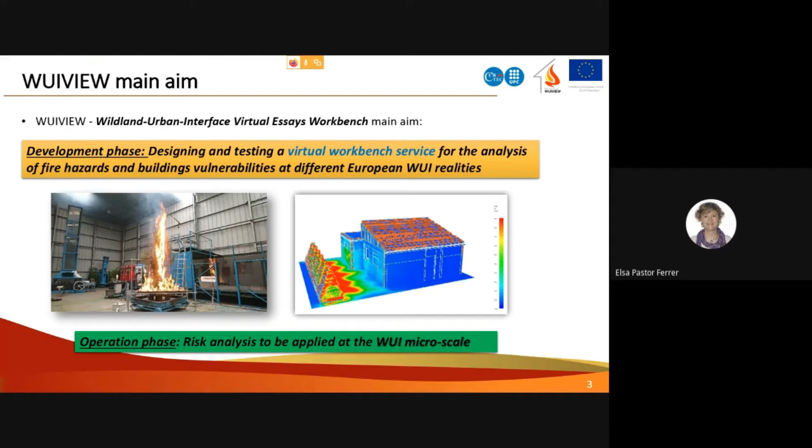By these 2 main core activities, we will be able to develop a risk analysis methodology to be applied at the WUI microscale. So we are focusing our work at this homeowner level. We are actually analyzing the problem at this very fine scale. How are we doing that? Which is our workflow? The overall activity of WUIVIEW relies on understanding patterns, factors, and processes occurring at the WUI microscale that might give us insights of how to better protect our homes.

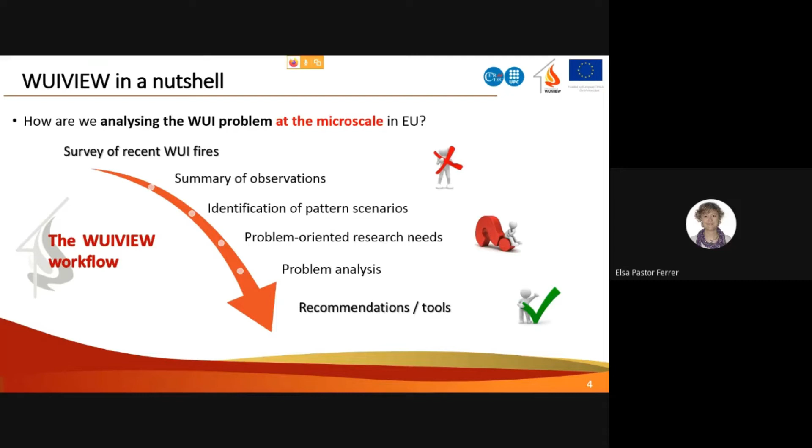Our approach, the WUIVIEW approach, has its core on extracting the main pattern scenarios responsible for homes damage from real fire observations. The consortium has devoted quite a lot of effort analyzing past fire incidents in a very systematic and precise way. Now, the whole idea is that, based on these identified problems, we are formulating research questions that may lead us to scientific-based answers and explanations to these empirical interpretations and assumptions of what we have seen in fires. Our aim is that after our analysis of microscale-related problems, we will be able to come up with a list of recommendations and a set of tools that may help communities, risk managers, and policymakers to get safer microscales.

So to achieve our objectives, we have done some preliminary research. Firstly, as I said, we have described the common scenarios we want to analyze, and we have formulated the research questions related to these scenarios. Secondly, we have been reviewing the state of the art in terms of standards. We have gathered information on combustibility of residential fuels, both of natural and non-natural origin, and we have also looked at the behavior of materials typically used in our homes in terms of fire reaction and fire resistance.

The analysis and demonstration phase consists of doing a whole lot of experiments and simulations to get these answers properly solved. And once we've come up with the right answers, we will be able to demonstrate and apply our methods and findings in particular study cases. After all this, the WUIVIEW action will provide several types of results and tools that, of course, will be freely available to the entire fire community.

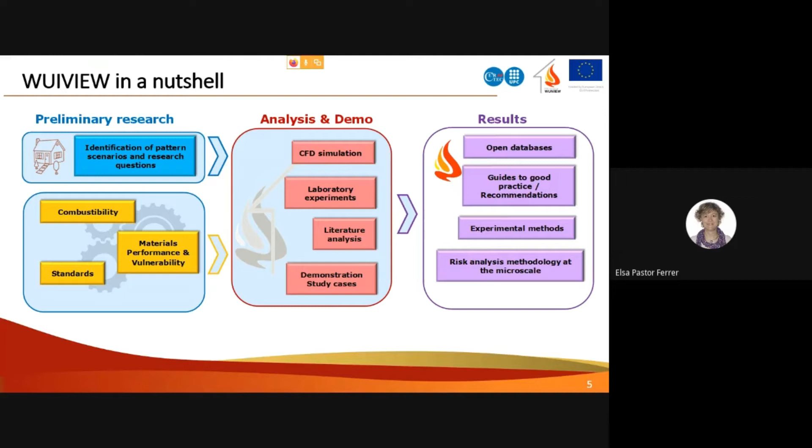Now, I'll give you some more details on these different blocks so that you'll have a better idea of why we are doing what we are doing. So let's start with a workload consisting of identifying what we call pattern scenarios. These scenarios come from the different lessons observed in WUI fires and involve factors and processes that seem to repeat in the affection of buildings.

To get those commonalities, to get those common processes, we have basically asked ourselves a key question when analyzing fires, which is actually in the head of many researchers, practitioners, administrations, and homeowners across Europe. The question is, if our houses are built mainly with non-burnable materials, such as stone, bricks, claystone, mortar, or iron, why do our houses actually burn?

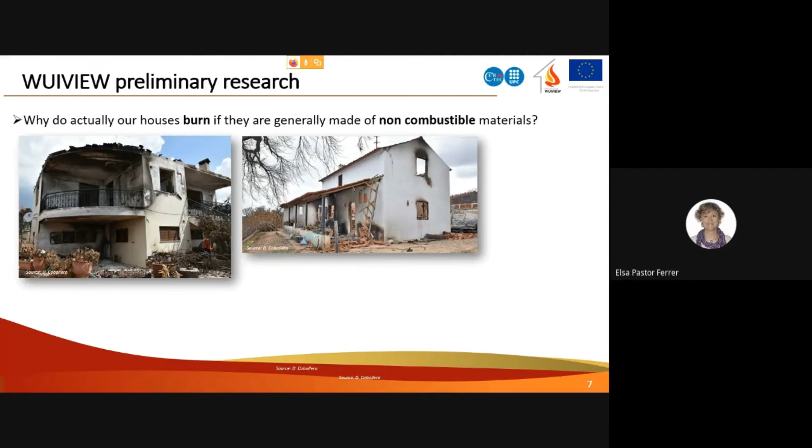Although no specific lines of research have been developed on this matter to categorically solve this question, a first reflection based on observation underlines the many complexities and subtleties which may lie behind the destruction of a house in Europe. In fact, many of the observations point at little details in the structure design and maintenance, elements, materials, or configuration, as well as the relative position, size, and type of the potential sources of heat which are responsible for the initiation and consolidation of combustion inside houses, and finally, the affection or complete destruction of a structure.

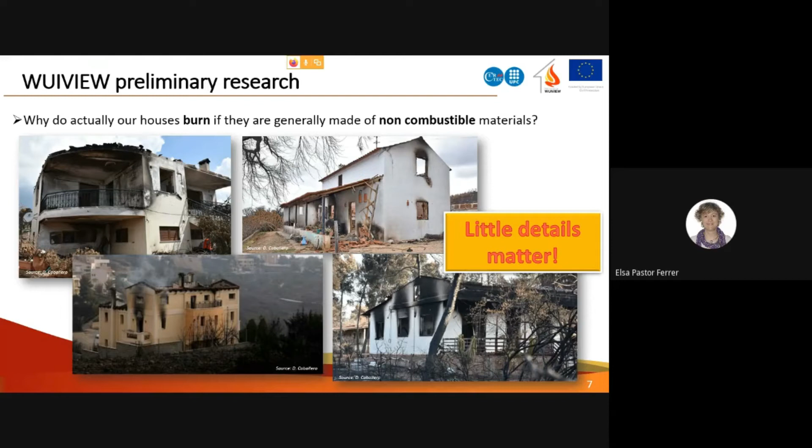If a property is poorly managed and the combustible elements commonly present at the WUI microscale are placed too close to a structure, they can be responsible for severe impact. The same is plausible in case of a settlement located too close to forested land. The combustion of aforementioned fuels, if placed close to unprotected glazing elements, can cause cracking or collapsing of the glass, hence giving way to the entrance of smoke, firebrands, and flames. Direct flame impingement onto window panes or other weak points within the house envelope can greatly affect the structure's integrity.

Confined or semi-confined spaces, such as garages, sheds, or storage areas, which contain non-natural fuels, are also vulnerable to fire embers, radiation exposure, and flame impingement. These secondary structures are often placed close to the main structure or are extensions of it. A large accumulation of heat in those areas due to the ignition of their contents could lead to fire spread to the main structure through internal doors, passageways, or windows, as well as to structural damage to the house envelope.

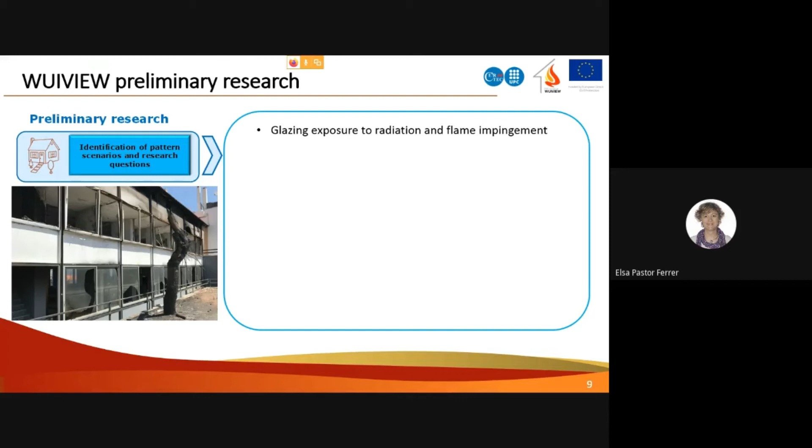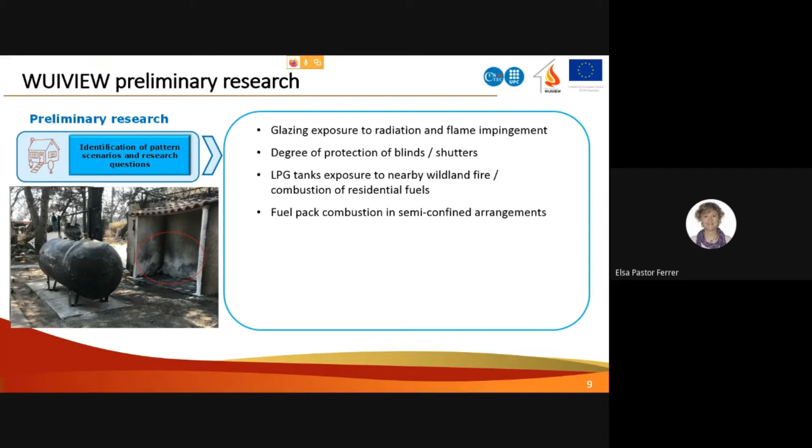Now, from these lessons learned, based on observed problems and vulnerabilities summarized in the event tree, we have outlined an inventory of simplified pattern scenarios formulating research questions associated to each case. Among others, our identified common problems worth studying are glazing exposure to radiation and flame impingement, degree of protection of blinds and shutters, LPG tank exposure to nearby wildland fire, combustion of residential fuels, fuel pack combustion in semi-confined arrangements, and the fire propagation over green hedges and ornamental elements.

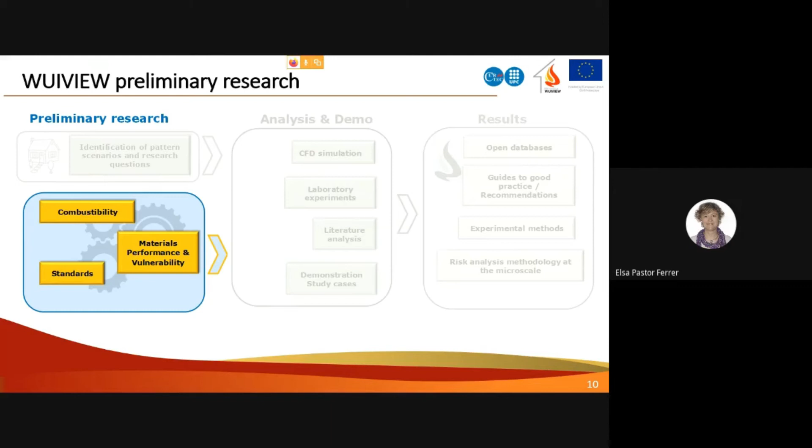Right, so let's move on to the second block of tasks concerning the review of the state of the art. We have done quite an intense literature review of the burning characteristics of residential fuels, burning rate, heat release rate, flame geometry, and duration of both ornamental fuels and artificial fuels. Unfortunately, we have realized that there is not much data available. But still, we have found some inspiring research coming basically from the United States. This is an image of a fire test of a Christmas tree undertaken at NIST laboratories. This type of experimentation is basically what we have done in the LEIF lab in Lousa. You'll see these activities reported in following videos.

We have also been reviewing standards. And again, the message is that several international standards covering WUI safety building and planning already exist, prescribing the design of the WUI landscapes and homes in terms of materials, safety distances, building systems, etc. Some of them might be inspiring for us, but we have to recognize that these cannot be directly used nor easily adapted in Europe, as they have not been developed considering European building practices and rules. But we've checked them all, and we will keep those in mind to meet our objectives.

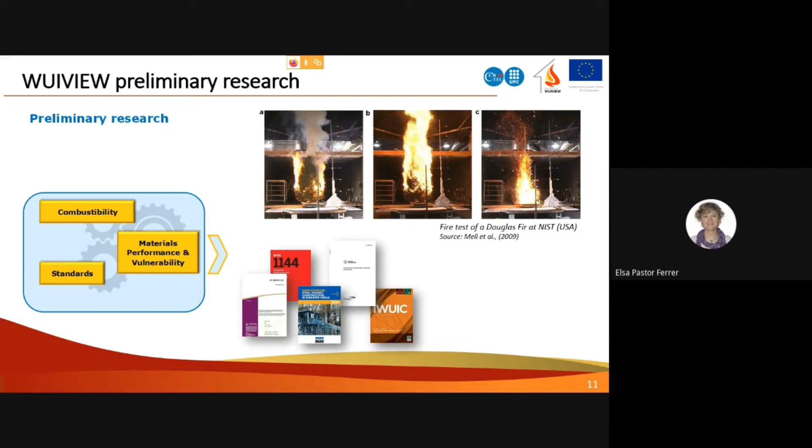And finally, we have been reviewing fire performance criteria of building materials and systems. We want to know critical temperatures, critical heat fluxes of building materials and systems that will serve us as thresholds to discriminate safe from unsafe scenarios.

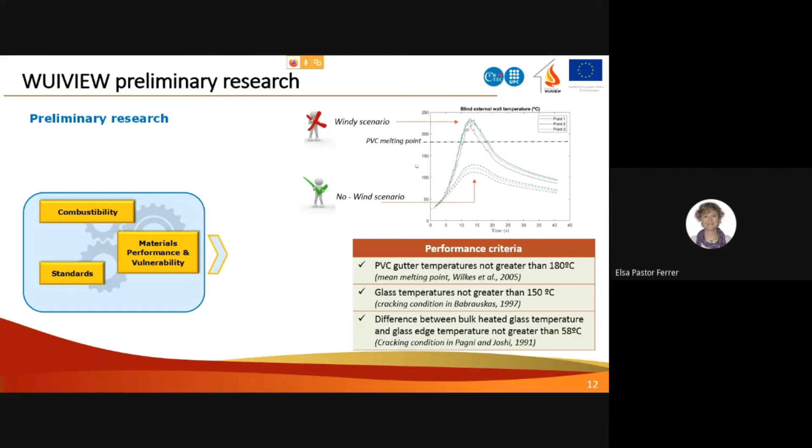For example, let's imagine that we can get the temperature evolution with time of a PVC blind in front of a burning tree at a certain distance in two scenarios, a wind and a no-wind scenario. We may want to consider that PVC melts at 180 degrees Celsius. So with this information, we can easily see how the scenario with wind may lead the flames close enough to the blind to get temperatures above the melting point, whereas in the no-wind scenario, our blind will be safe. So this is basically our idea, our rationale.

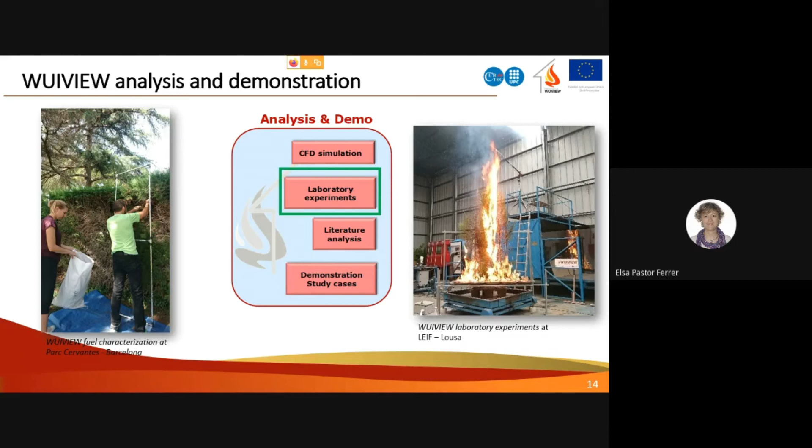Regarding analysis, how are we analyzing the pattern scenarios? We are basically doing two main tasks. We are doing laboratory experiments to get data from the burning characteristics of ornamental fuels and non-natural fuels that haven't been studied yet. In terms of ornamental fuels, we are basically studying green hedges. As we have already seen, these fuels are problematic because behind a green layer, a huge amount of dead material is hidden, contributing a lot to fire percolation through WUI communities.

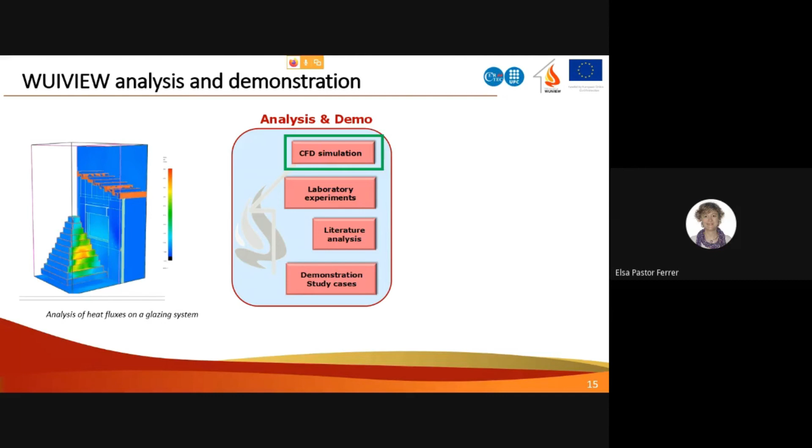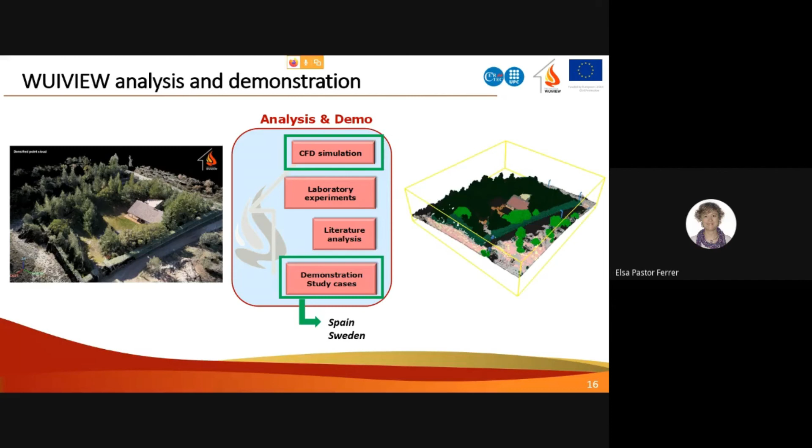What type of outputs will we try to obtain? The outputs from the WUIVIEW action will be diverse and will hopefully be of interest for all different fire actors. Firstly, we will generate new data, new insights regarding fuel hazards and building vulnerabilities. This will be the basis of our overall fire risk reduction strategy and will benefit fire services, communities, fire managers, and practitioners. Next, we will issue modeling scripts and guidelines for open source fire simulation codes to assist fire practitioners in their designs.

Professionals will have available a new tool for fire risk analysis with free access to the modeling library and database. We are developing dissemination material at different levels to share our findings, and finally, we will gather those findings by listing scientific-based recommendations for regulations improvement, which will hopefully benefit policymakers and administration.

We believe that the WUIVIEW action will result firstly in a general knowledge and awareness improvement for all fire actors. In our opinion, this is very important, since it is with more aware and educated WUI fire actors that a higher level of protection will be achieved. That is for sure. In addition, we will provide fire practitioners with new capabilities for fire risk managing and engineering. Fire engineers and architects will have advanced technology available to develop new skills to face emerging WUI fire safety problems.

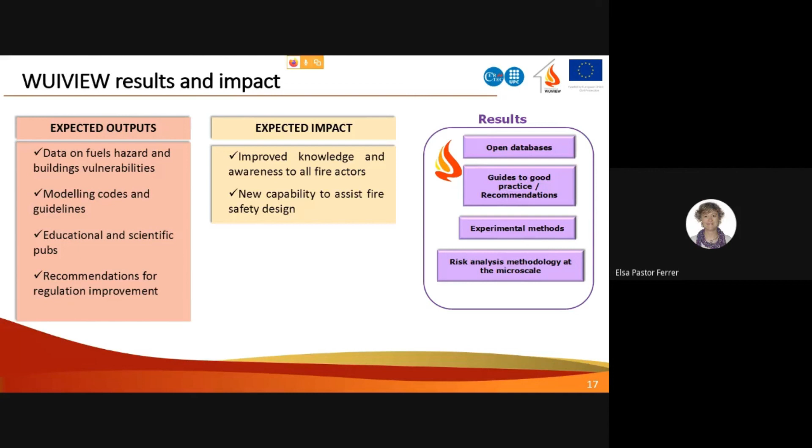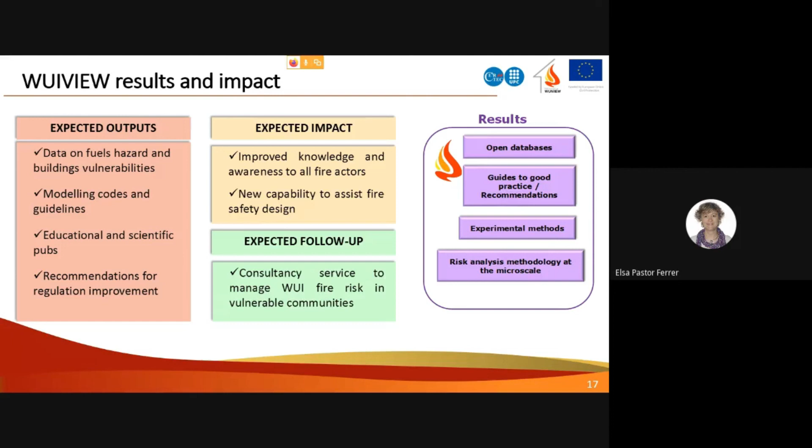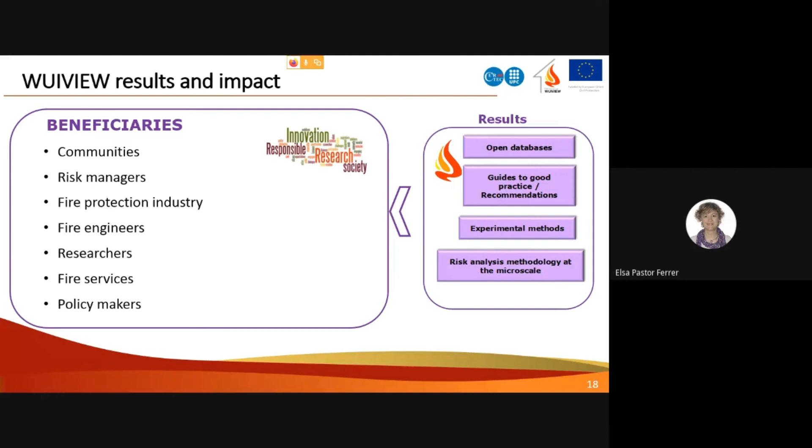WUIVIEW has originally been conceived to become a consultancy service to assess WUI vulnerability in real scenarios after the action's time. So we envisage the WUIVIEW workbench operation helping residents and fire risk managers to analyze fire risk in communities, assisting the fire industry and fire engineers and architects, in particular in their designs, and providing scientifically based information to fire services and regulatory bodies.

Just to wrap up, WUIVIEW tries to provide insights and methods for self-protection in case of fire. It has been demonstrated that self-protection is a real need, and we have to help our communities with clear messages of how to prepare their homes to face fires. With our project, we are following an analytical method to take the most out of the lessons learned in past fires. We have identified patterns, factors, and processes responsible for home damages, and we are analyzing those through CFD simulations and fire experiments. In our opinion, both techniques are complementary, leading to an overall WUIVIEW methodology that is quite powerful and flexible.

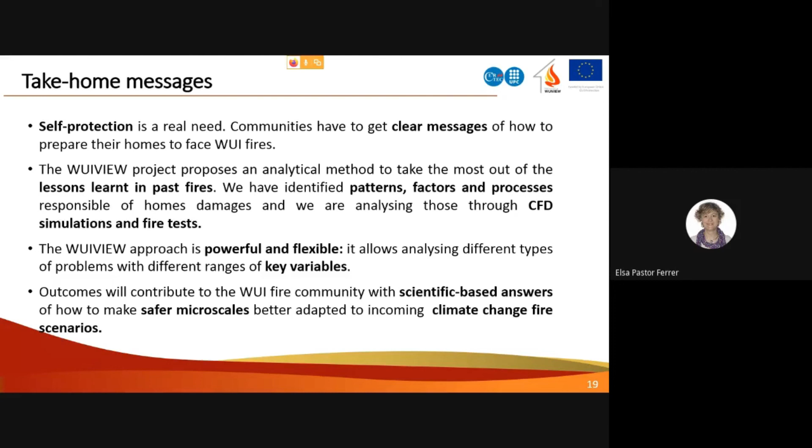We can analyze different types of problems with different ranges of key variables: fuel loads, building materials, geometries, wind, temperatures, etc. So we will keep on performing our analysis, and hopefully we will contribute to the fire community with scientific-based answers of how to make safer microscales better adapted to incoming climate change fire scenarios.